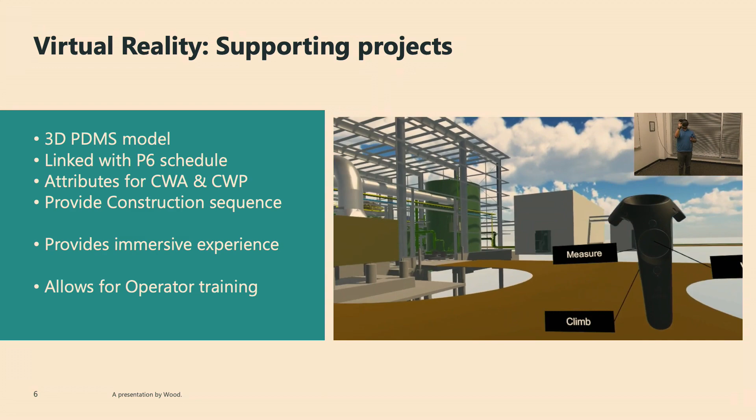I'm going to take a minute and show you a little video of one of these virtual spaces and one of our project team members walking through it. You can see the guy in the corner is in the office, and he's trying to figure out how to use this technology a little bit.

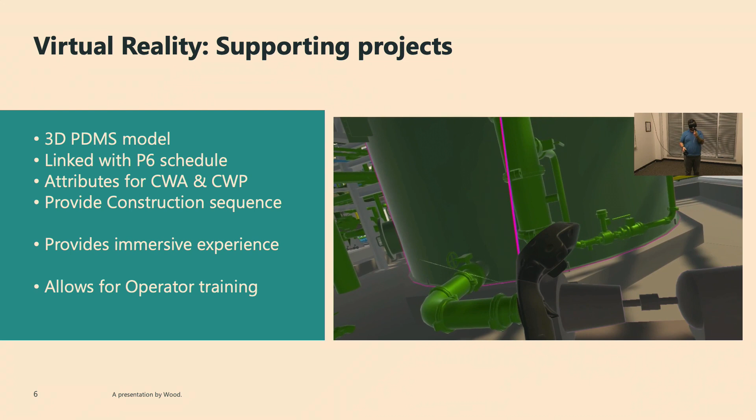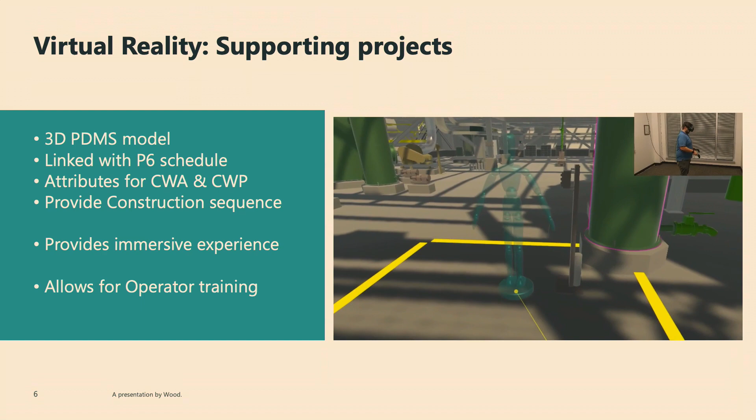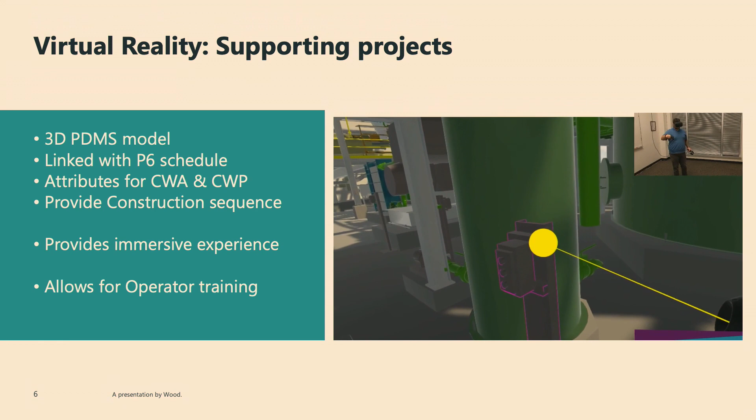So you can see he's querying items, it tells him everything of what they are, how they fit in the sequence. And now he's taking measurements.

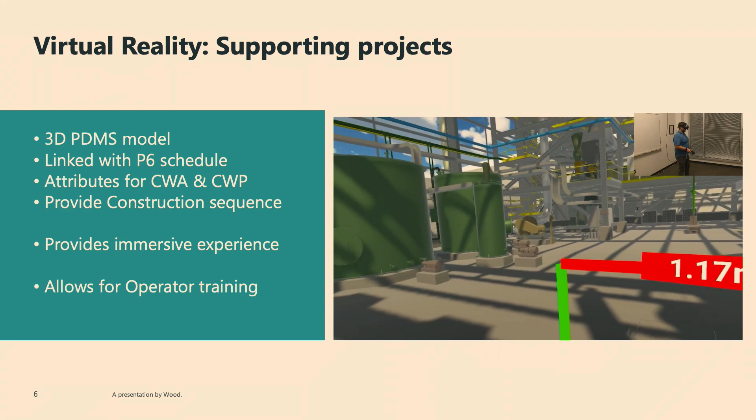So what this does for us, it gives us a great collaborative experience. It helps us with our different discipline engineers collaborating. It helps us with clash reviews. It gives us a good virtual platform for constructability reviews before we move to the field. You can see there he's almost walked into the wall.

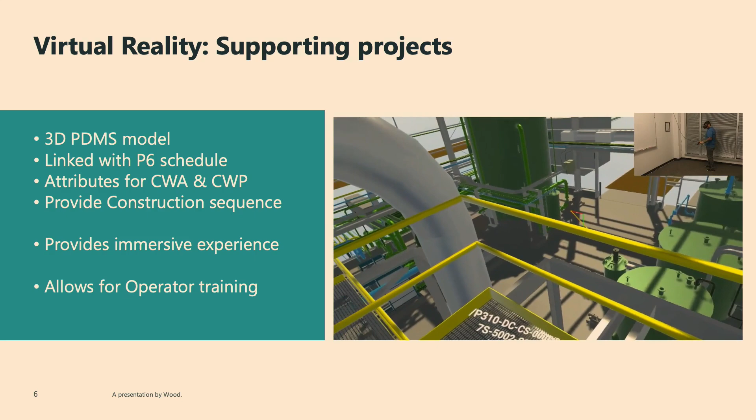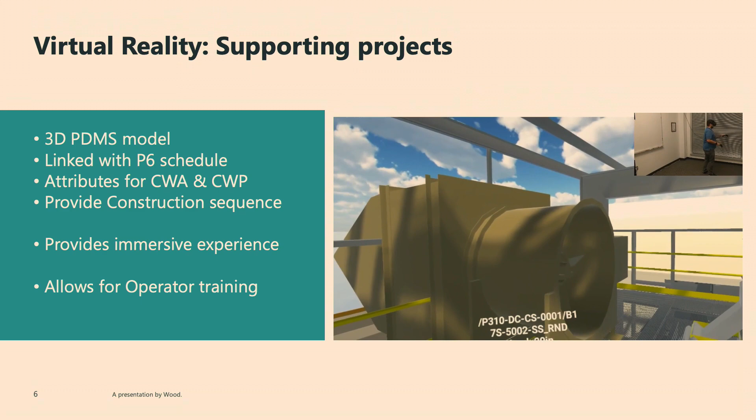So it's a truly immersive environment. And we even use this, especially for the facilities or assets that we're being asked to operate. We'll use it for operator training, and in some cases, we're passing it on to our clients who are using it for operator training. If you can imagine, the operator, before the facility's built, gets to walk around in that facility or on that asset virtually and gets to see what it's going to be like. They get to go through different work tasks, walk around and see the equipment and feel what that environment is like, and even look for escape routes in the event of an emergency and get to plan how that's going to look.

Okay, so augmented reality. This is one of my favorite spaces.

So at Wood, we're using HoloLens. And when we're on site, our site teams can walk around and they can see where they are in reference to what has been built and what the next task is, or the next work package, the next phase of that installation.

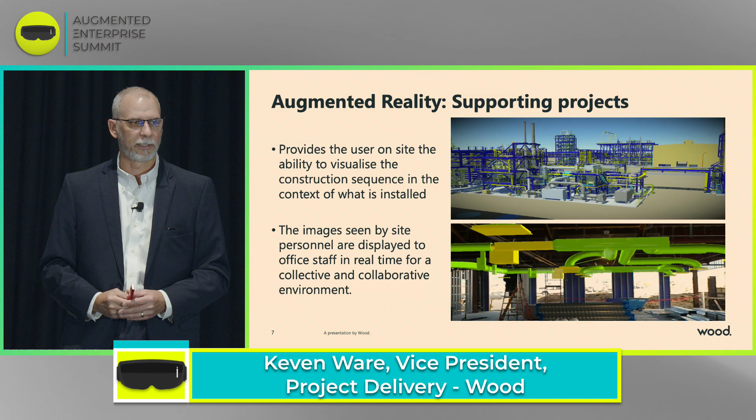Okay, so diving into connected worker. These are, in most cases, we're thinking about a smart wearable headset when we think about connected worker in a construction site. At Wood, we've been on this journey now for about 6 years.

We realized that one of our largest challenges in construction was having the frontline worker engaged with all the materials and knowledge that they needed to be able to perform their task. And we need to improve time on tools. Time on tools is when that worker physically has their hands on the tools and they're working. Anytime they stop to ask questions, they're killing productivity, they're killing progress. So getting them the information they need at the time they need it so that they can continue to be effective is what drove us on this connected worker journey.